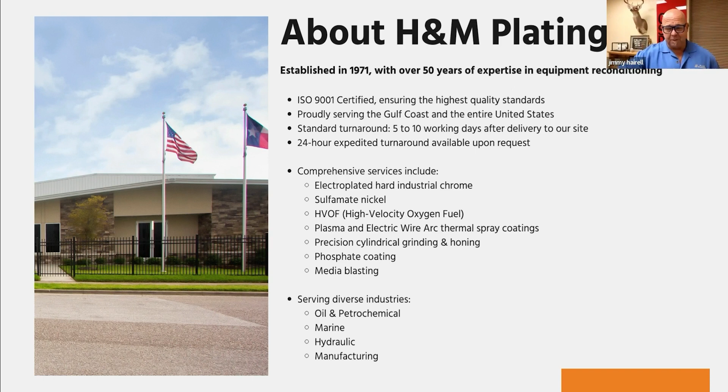There's the tag team duo. I've been with the company now 17 years. Michelle's been here 3 years. And man, it's been a hell of a ride. Some big things that make us stand out from everybody else in the industry go back to our core values. One thing that I've always said is that we're only as good as our customer service. If we can't go out and give our customers the time and effort to sit down with them, give them some consulting, help them with projects, then why would you want to use us?

So one of our big things is you've got to have communication and knowledge of what we're doing here. So many of these places get complacent with just selling stuff instead of, let's sit down and figure out a way to actually make your product better for your customer. Let's make this a better situation where people are going to say, you know what, I don't want to go to the X spray shop, I want to go to H&M Plating. Those guys will actually sit down and figure it out and help me out with it. Some of our customers don't know everything about spray. That's our job.

So the next thing is our turnaround times. Because of our capacity, we've got nearly 100 grinders throughout our company, we can do quick turnarounds, 5 to 10 working days standard most of the time, and expedited stuff anywhere from 2 to 3 days. Today we're talking about turbines. We turn turbines around all day long when some of these refineries get into a bind and need it quick. We've done it in 1 to 2 days sometimes if we need to. Obviously, it's going to cost a little bit more, but we can do it.

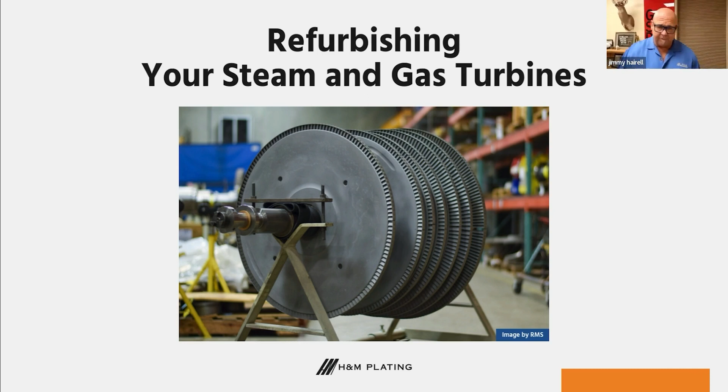These are high dollar, high RPM parts that have to be precision ground and precision coated. Otherwise, you have catastrophic failures in the field, and everything will come apart because they are turning at 5,000 RPMs, 10,000 RPMs, depending on the size and complexity. They go really fast. And if you don't have everything done exactly right, the coatings will come off, and it's not going to work in the field. You never want a reputation where your coatings are coming off.

So surface preparation: the rotor or a turbine shaft will come in. First thing we do is we put it between centers. We'll make sure that the concentricity on the centers runs from end to end, and we're usually within 1/10 to 5/10. These are high precision parts that have a lot of RPM. So if there's any vibration when it's in the machine running, if that thing gets out of whack or out of balance, it's going to mess up that coating, it's going to come apart, and we're going to have to redo whatever we've already done. So the first thing is we make sure the centers are good.

We go in, we'll prep the areas. Usually your bearing journals and seal fits are the ones that go bad. Most of the time, it's just the bearing journals, which you can see in this picture, the first area right up next to the wheels. We'll prep grind those areas, remove the old coating, take that area down to a clean, smooth surface, and make sure there's no pinholes or anything like that.

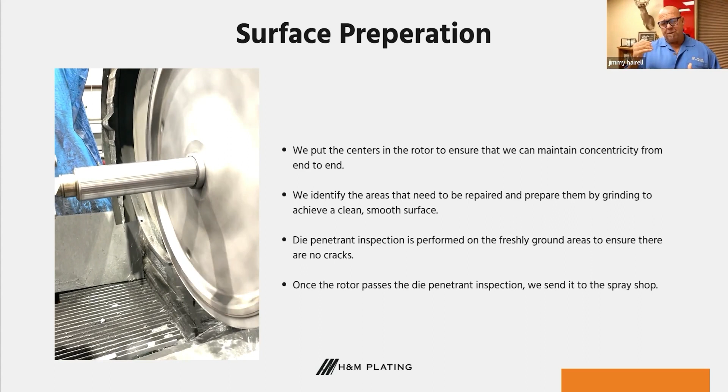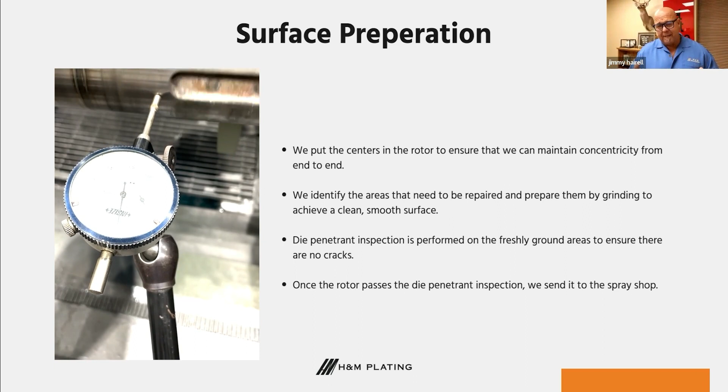Once we've done that, we stop, we check it, see how deep it is, see how much coating we're going to have to put on, and then we will do a dye check, which is a dye penetrant inspection, to make sure there's no indications of any cracks or pinholes in that base material. We never want to leave pinholes in there, and if the shaft is cracked, you have to make a new one. So we always check that before we move it on. Once it all passes the dye penetrant inspection, we move it over to the spray shop.

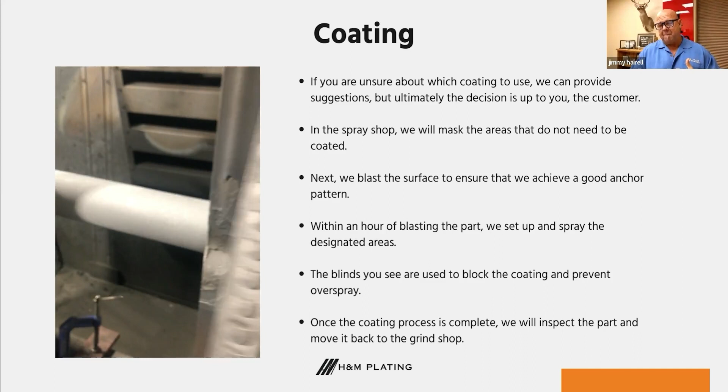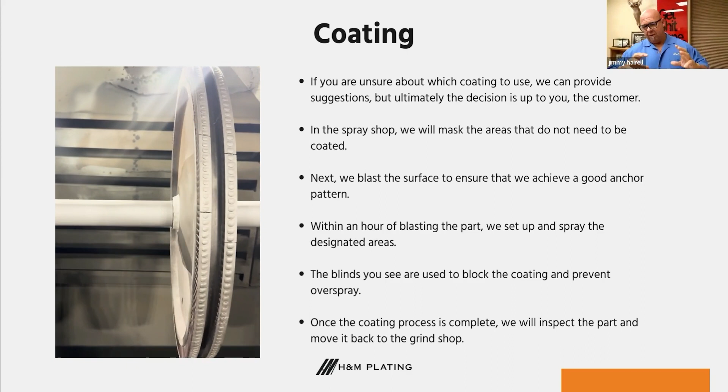So now we've moved your rotor over to the coating area, which is our spray shop. First thing we'll do is determine whether or not we need to mask any areas. Usually we'll mask the wheel area because we don't want any overspray on the wheel, because again, you have to balance all that. You don't want any overspray on anything if you can get away with it. If you see in this picture at the wheel hubs, we've got that area masked.

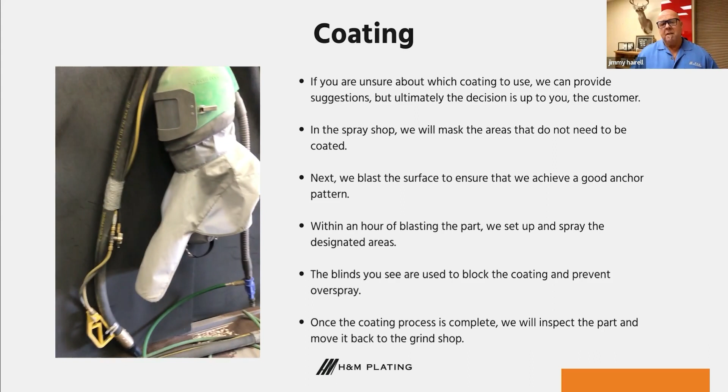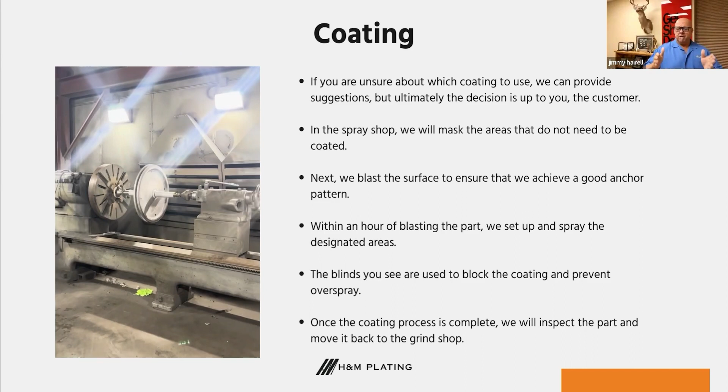Now, when we spray this, because it's not as close as some of these others, we can actually just put up blinds to stop the coating from overshooting a different area. So first thing we do is we take it over and clean the surfaces that we're going to spray. Then we'll mask the wheel, mask any areas that we need to cover, and then we'll blast it. Once it's blasted, we have about an hour from the time it's blasted to the time we put it on the machine to actually spray it.

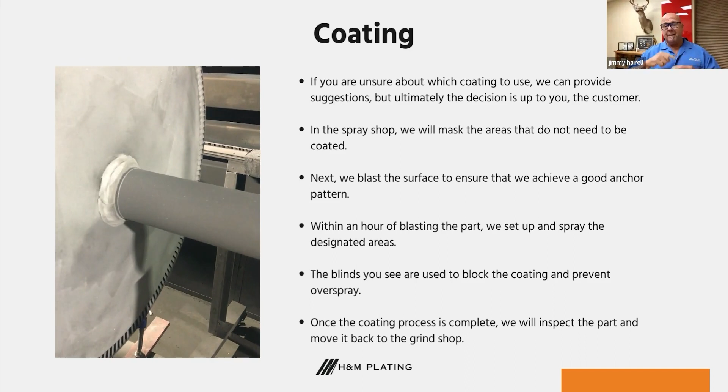And I say that because there are a ton of companies out there that will actually let these things sit overnight. And here in Houston, you got a ton of moisture, a ton of humidity. It gets into that blast and it won't give you a good bond strength. It'll grind good, it'll look good, but once that thing gets wet or damaged, it'll wind up coming off. So you don't want a delamination issue.

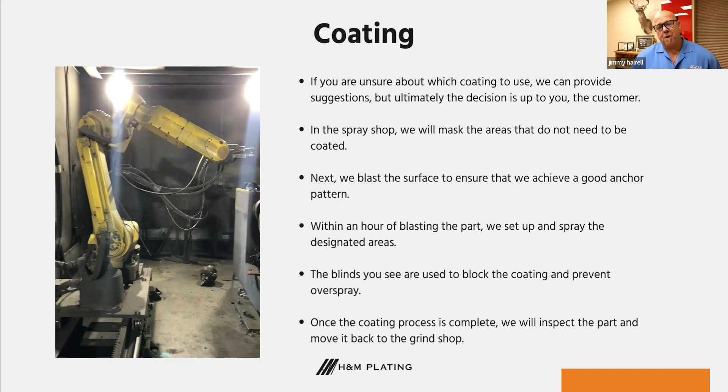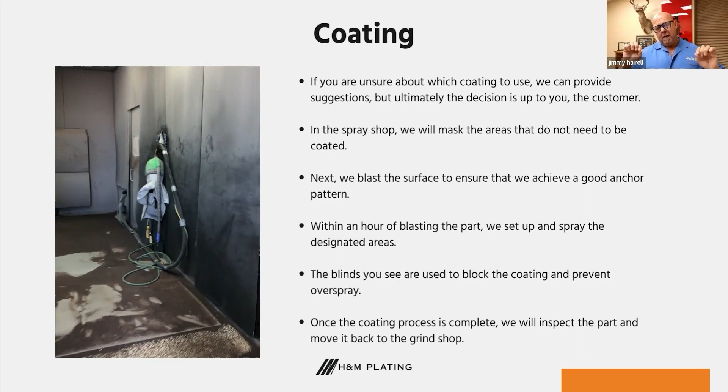Then once we get these into the machine, this video illustrates how we're actually spraying it. We'll set it up, we'll spray it. We try and shoot for overspray. Let's just say we're trying to hit 1 inch as a diameter that we're trying to cover. We will shoot it probably 20 or 25 thousandths oversized in order to maintain true concentricity in that area, and also make sure you have enough to come down to make sure everything is true and straight.

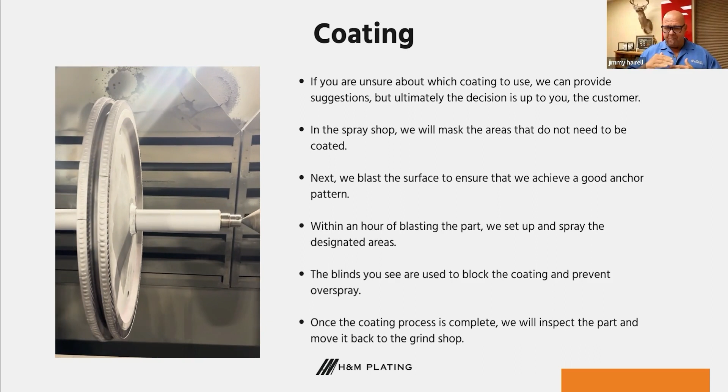So once we do that, we'll take the mics, go in, and make sure that we've got enough stock for the grinder to be able to achieve his part of it, and then we let it cool, and then we'll move it back out to the grind shop. Anybody have any questions on that?

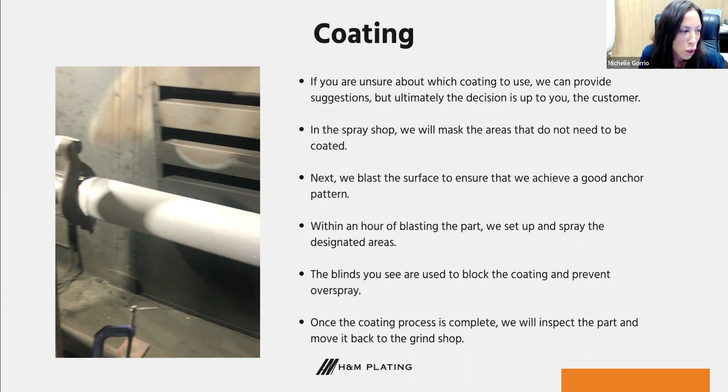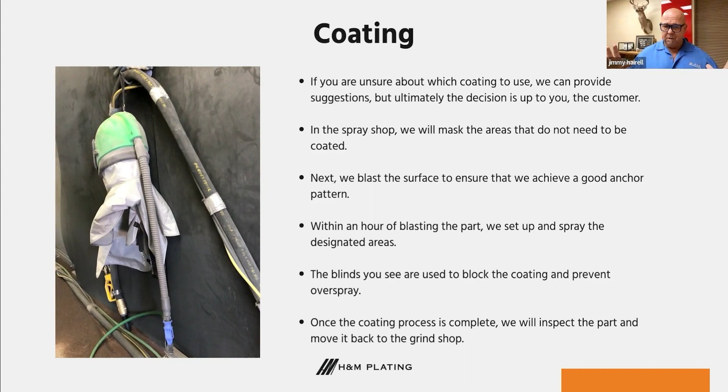Yes, Jimmy, we have a question. They want to know if you guys ever remove the compressor discs to rework the shafts, or if they're permanently on there, or they can be removed. Great question. Are you talking about the wheel? Yeah. Okay. So on the turbine wheel, 9 times out of 10, we fix this without having to take that off, because that's usually on our customers.

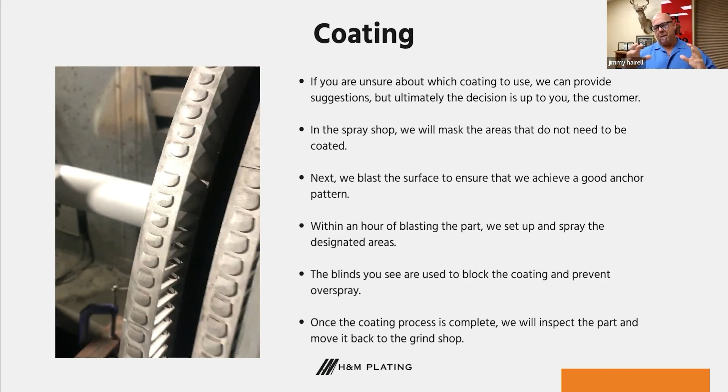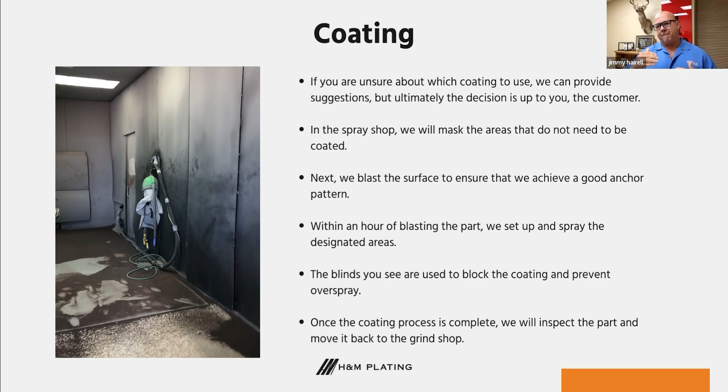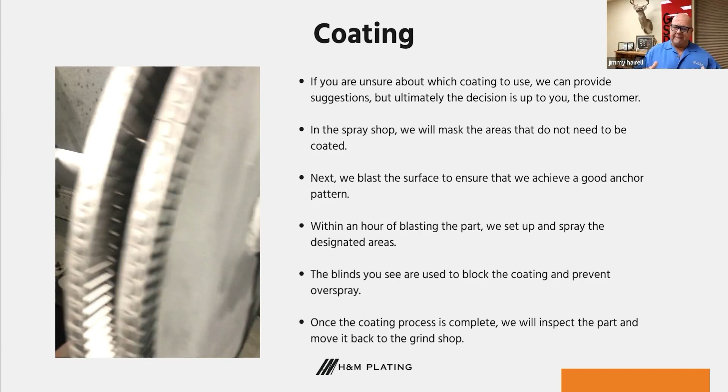The big thing with that is that it is so hard. You have to heat that up because it's a pressed-on fit. It's really difficult for the customer, basically our end user that sends them to us, to take that off and then have to go and put it back on when you have new fresh coating. So 9 times out of 10, they leave those on there. And if they have to take it off, they're usually making a new shaft. And we'll talk about new shafts at the very end of this because we can also do those.

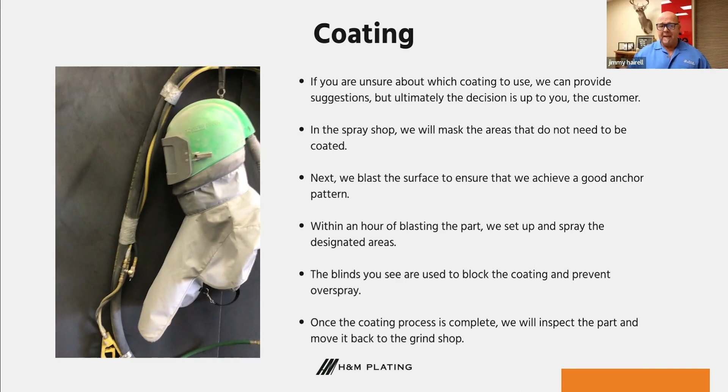But that is a great question because it is very difficult to take these off and then put it back on. And once you get it back on, you got to rebalance it and the whole 9 yards. You're going to have to rebalance it regardless. But it's easier to just leave it on there. Let me get everything running straight and then kind of go from there.

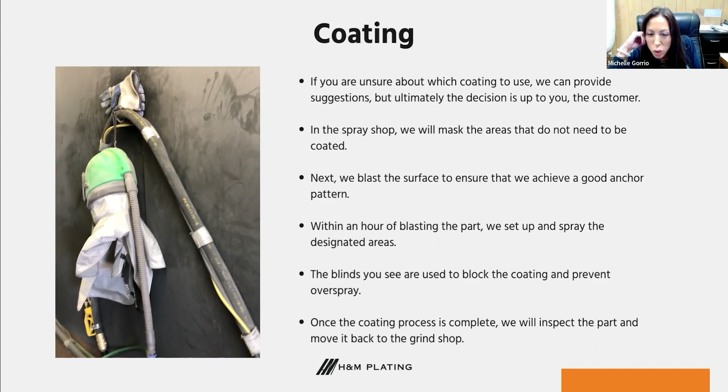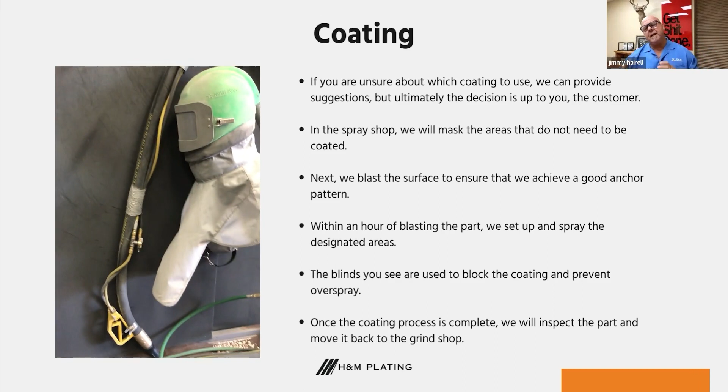Also, what is the maximum size that the wheel could be? Is there a max weight? Well, currently our max wheel size is up to 47.5 inches in diameter, and our weight was about 10,000 pounds. Let's just stick with that for now. We are putting in here at H&M some 20,000 pound cranes, but it's difficult for me to get a 20,000 pound part into our spray booth just because of the overhead capacity in there.

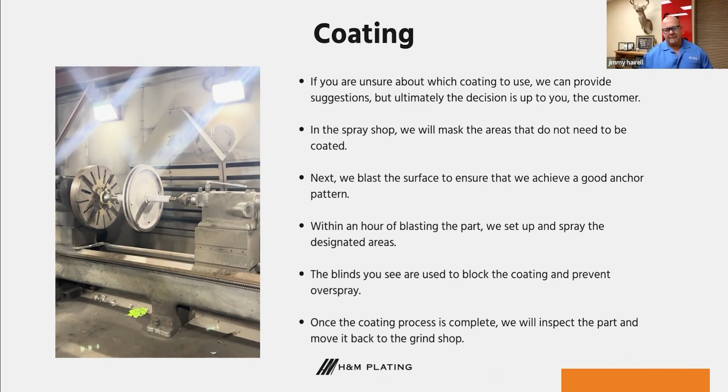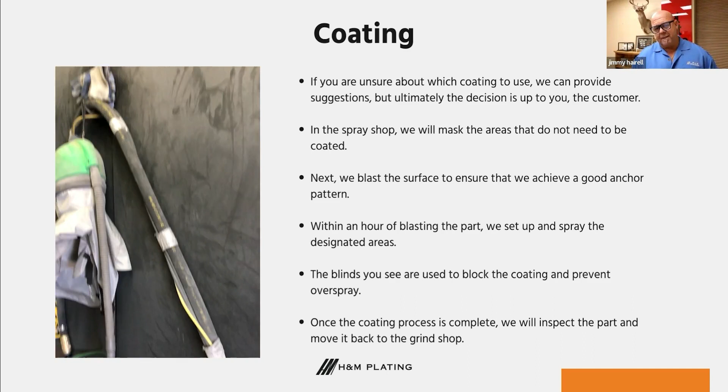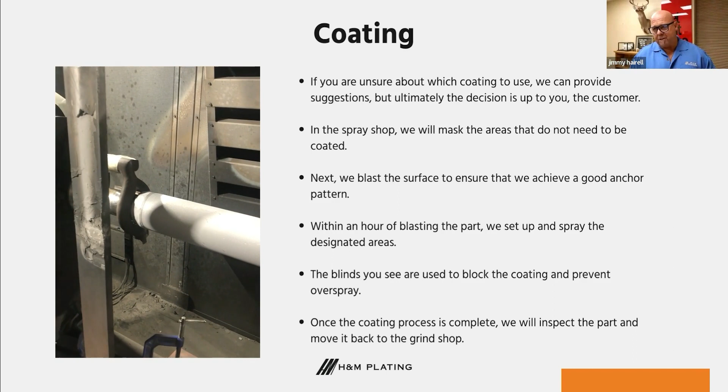But we like to stay at 10,000 pounds. These shafts aren't always that long, but when you start adding those wheels on there, when you have a multiple set of wheels, they get super heavy. So you wind up getting bigger turbine shafts and stuff like that. But right now we can turn up to 47.5 inches and about 10,000 pounds. All right, let's go to the next video.

Finish grind process. This is where your precision grinders have to be dead on. What I mean by that is the first thing that we do is we'll put this back up in the machine once it's actually been sprayed.

We put it up in the machine, we re-indicate to make sure that the shaft itself is still running true and straight. Again, your tolerances on these are about 5/10, okay? Not 5 thousandths, you're 5/10, okay? Some of our customers want us to hold like 2/10. So, I mean, it's a crazy way to look at it, but if you really think about it, that's almost dead nut. There can't be any indications on that when you put an indicator on there. Can't be any movement in there, hardly at all. So that's the first thing we'll do.

We'll put it up, we'll check it, we'll recheck the areas, make sure we got enough coating for the grinder to hit size, and then he'll start his finish grind process. Typically, we'll grind one side, and then we'll go to the other side, and then we'll polish. It just depends on that grinder or that day, but usually you want to go in and leave a little stock, to where you can actually polish it back down the areas that you're doing.

So typically we do about a 6 RMS finish on these shafts, and then we leave no waves from the polishing. You leave absolutely no waves in that coating to where you have a nice smooth finish. If there's waves in it, a lot of customers will reject it, and or you may have to just redo that area. It's very difficult, and it is a precision technique that you have to get, again, dead nut on this. So first they'll grind it down to size or within maybe a thousandth, and then they'll polish it.

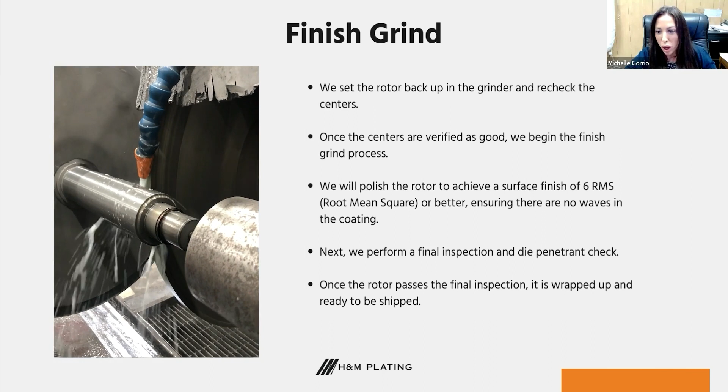Yes, Jimmy, Gus has a question. He's asked, do we typically include hardness testing with our processes, with our paperwork? We can, we don't. So that's a special request, sir. We don't normally do that, but we can if that's what you want. And then also we have another question about if we do burnishing. We don't do the burnishing in-house. We're working on that. We're going to set that up here in the near future. Currently, we have to send that out. Everything else we do in-house. Those are really good questions too. Thank you, Gus. Any other questions?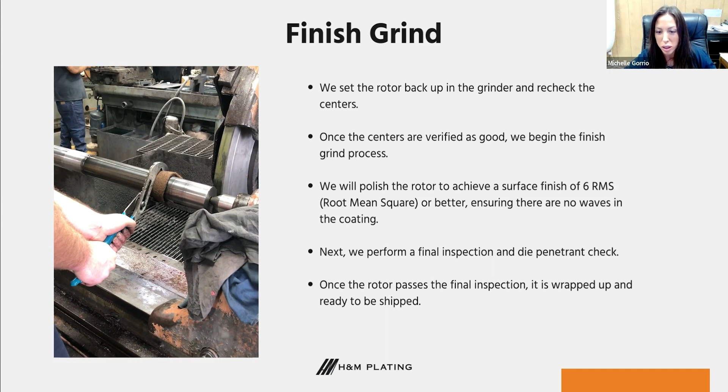What is the tightest tolerance we can hold on the shafts? Man, the tightest tolerance you can hold on a shaft is about 2 tenths. 2 tenths. Yes, ma'am. And that is, again, an art in itself. And then how about the surface finish? What's the best RMS finish? Again, our standard is under 8 RMS. Usually it's 8 to 6 RMS, but we're almost always under that. We give it back to you like it's brand new. And those are really good questions too, by the way. What else, Michelle? One more question.

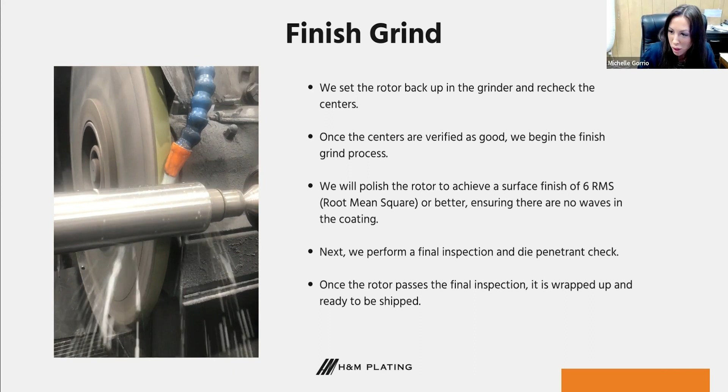How do we check the centers? We'll verify the centers. You put a dial indicator on it. First of all, you're gonna cut centers. The guy that cuts the centers is gonna have a dial indicator on the actual shaft where we're running it, and he checks all the areas on the shaft to make sure they're all running true and straight. So we'll cut the centers, and then you'll have an indicator. I know you can't see it.

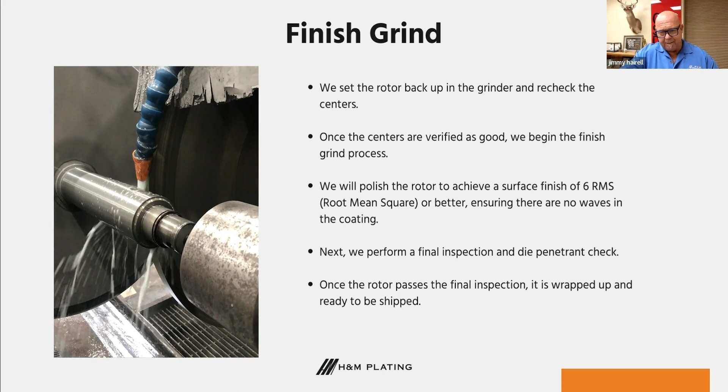I don't know if y'all can see my little arrow right here, but you see that center that's on the end of the shaft. You'll check that first area, your second area, and then you'll check the bearing area. And you just run it all the way down the shaft just to make sure that you're running within 0.5 thousandths. That's another really good question.

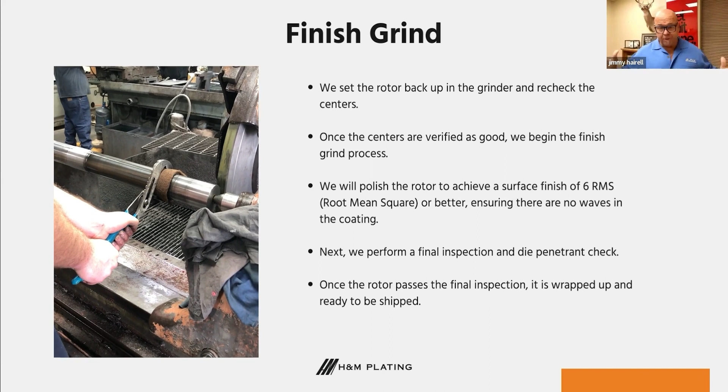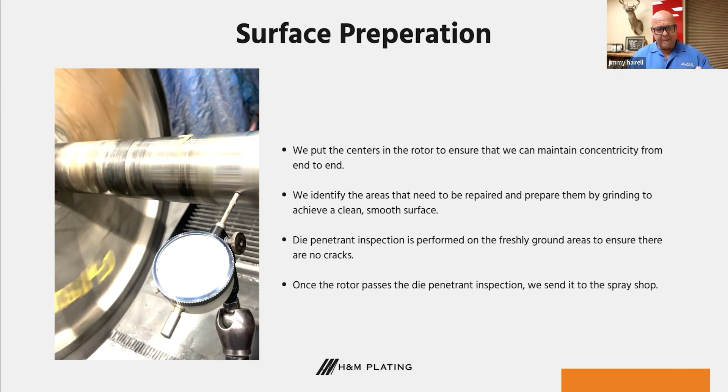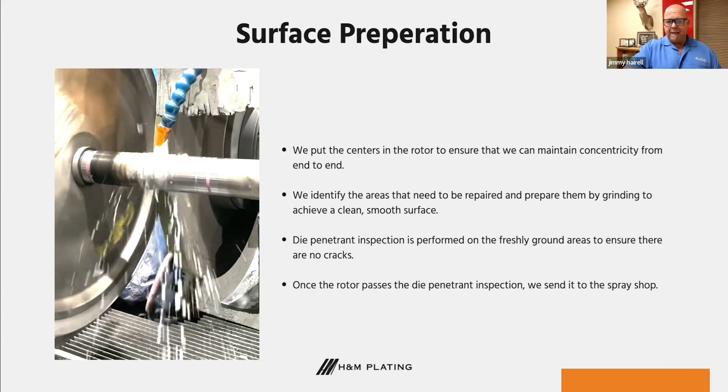Now, of course, there's a whole lot of processes that go along with that. We have to make sure that all of our calibrations are done on all of our instruments to make sure that nothing's off. There's a dial indicator. So this is how you would actually check it. You would actually run that dial indicator on there to make sure that you're actually within tolerance all the way down that shaft. Any other questions on that? Does everybody understand that?

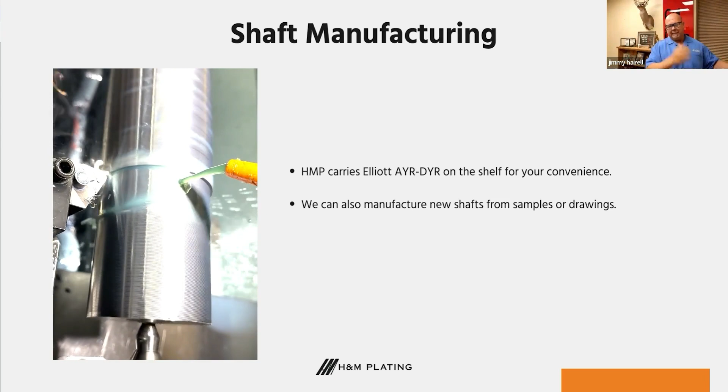Okay, so all we've talked about so far is repairing shafts. All we've talked about up to this point is the fact that you're going to send me a shaft in that's got a wheel hub on it or a turbine wheel on it, and then you're going to want me to refurbish the areas that are worn out. We also have the ability to manufacture shafts. Here at H&M, we actually carry all the Elliotts, AYR through DYR, on the shelf, so it can be made and done within a couple of days of you ordering one.

And we've got them sitting on the shelf. They're blank. All we've got to do is cut the fits and coat and grind it and then polish it. So please keep that in mind. And again, it's not just the Elliotts. Those are the ones we keep on the shelf. They're usually the most popular.

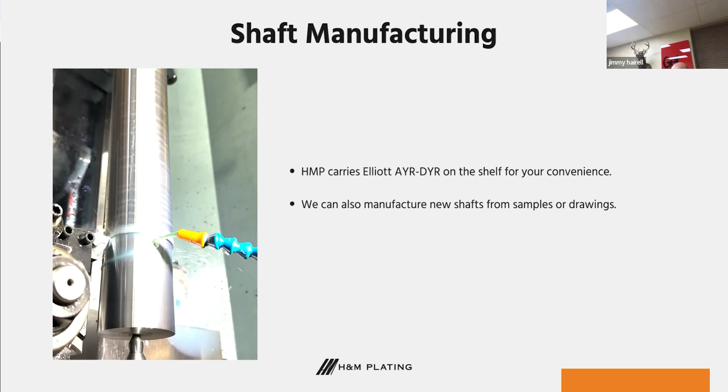So you've got a Terry shaft that I've got sitting here in my office that is literally brand new. All we would have to do is coat and grind it and send it out to the customer. Everything has already been done, but we manufacture these. So if you need somebody to help you guys out with manufacturing this stuff as well, then we can do that. We have manufacturing.

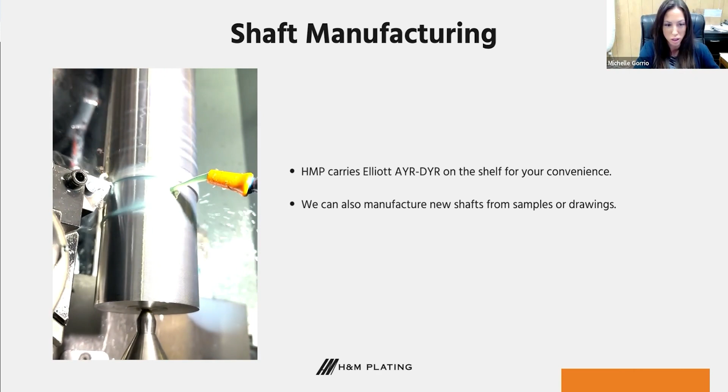Another question real quick. What is the base material that we use for the shafts that we stock? It's usually 4140 or stainless. Actually, yeah, it's 4140. And can we provide the MTRs, the material certs? If we manufacture the shaft, Michelle, we have to provide the MTRs. Yes, ma'am. Okay. That's part of the service with it. We can provide all that information.

Again, we're still going to give you a runout report. We're going to give you dye penetrant, before and after the coating goes on. And then you also are going to have the coating certificate. So you'll have all that when we make you a new shaft, plus your MTRs.

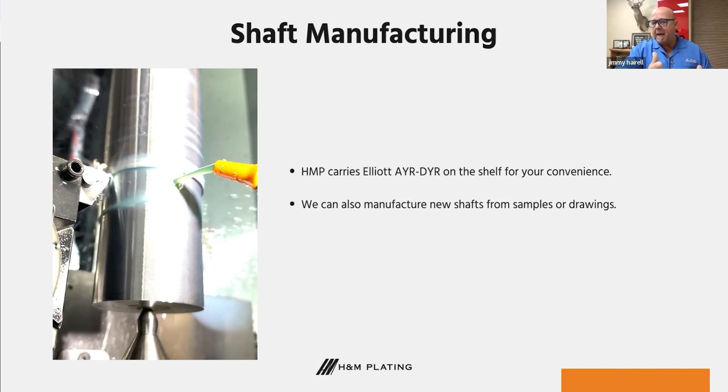So keep us in mind. Again, we can manufacture shafts or refurbish them, however you guys want us to do it. We can do it both ways. Just call me or Michelle and let us know what you need. We can do them in a rush, or expedited. We can do it however you need it. We have been doing it for a number of years now, and we are actually becoming one of the best at getting parts out the door.

So here's the benefits of refurbishing. First thing is just like this right here. You see all those wheels on there? That is a son of a gun to get all those wheels off of there. That is a project in itself. I can't see how many people we have listening to this, but if I've got any customers on there that deal with these, then you guys know you'd have to heat these up and hammer them down and get them all off of there for us to be able to fix that shaft.

The big thing is we can hold that shaft up, coat and grind the areas that have been damaged, and then give you this shaft back, not ever taking the wheels off, and give it back to you in a few days, and man, off you go. And you didn't have to have all that extra work that's involved in taking these wheels off. So refurbishing can save you time and money.

Obviously, when you have to make a shaft, it takes a couple of extra days. Plus, then it has to come back to me to coat and grind. So it goes from machining to coating and grinding. So it takes extra time. If you just give me the shaft with the wheel on it, man, we can do it pretty quick. So one of the benefits with us is we provide the fastest turnaround in North America.

Nobody else can keep up with us as far as what we're doing. We've got several shifts, so we can coat and grind at night and during the day. So we've got 24/7 capabilities on that. We're the number one team in North America that's actually going to help you consult with what you need and get you out of a bind on anything that you need help with.

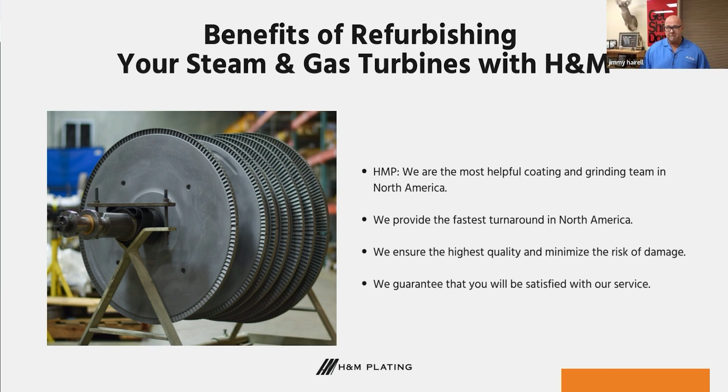The big thing is that most of these companies that are still doing what we do have people that aren't interested in going out and talking to the customer anymore. They want to sit behind the desk and say, okay, just send it. Just send it. Well, some people have forgotten what it's like to be customer service. It's not just the sale. Even if I can't help you, I'm still going to give you ideas on where you can go to get whatever you're looking to do done.

It's all about connections and it's all about networking. If I help you today and it doesn't benefit me, you're probably going to try and call me back at some point and say, hey, can you help me with this job? So that's the reason why we always want to make sure that we're trying to satisfy our customers no matter what, even if it's not coming to us. So, questions, concerns, Michelle? Yes, we do have another question.

Awesome. Do we only work on the shafts, or are there any services that we can provide on the wheel? We can coat and grind the wheels too. We don't normally talk about that, but yes, we can coat and grind the bore on the wheel. You'd have to take the wheel off in order for us to look at that bore. I don't have any pictures of that right now, but we have coated and ground the bores on some of these, and it's a tough job, but we've done a bunch of them like that.